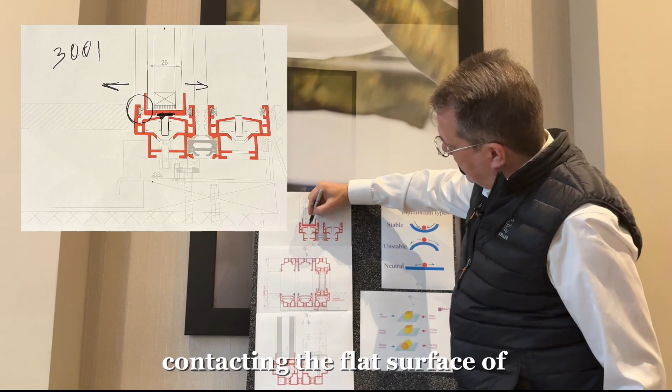So earlier Vitrocsa systems had a bearing wheel surface which was flat, contacting the flat surface of a special plate underneath the glass panel. And that actually is neutral equilibrium, because this glass panel during sliding can deviate to either left or right, creating friction.

So we have different kinds of friction as well. One of them is sliding friction, and one of them is rolling friction. This is what is applicable here. So the sliding friction is the friction between the brushes and the wall of the extrusion and the glass panel, so in this area. And the rolling friction, of course, is the friction between that plate and the bearing wheel.

What happened there? Initially, Vitrocsa used brass plates underneath the glass panel, and unfortunately, brass is kind of a soft material, and that friction is substantial. And also because of neutral equilibrium, the friction is not even, and because the panel can deviate from the straight direction, the friction on either outside or inside surface can be different, and it may result in the panel getting stuck and difficulties sliding this glass panel.

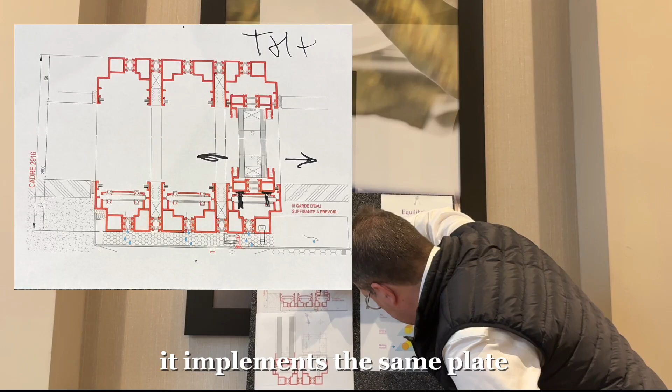The first system, which was Vitrocsa 3001, had limitations as for dimensions and the total weight of the panel. So in later years, they developed a new system, which they call TH Plus, with 2 rows of bearing wheels, and basically the same system. I don't think you can see it, but it implements the same plate, which is perpendicular to the bearing wheel. And again, this is a classic example of neutral equilibrium.

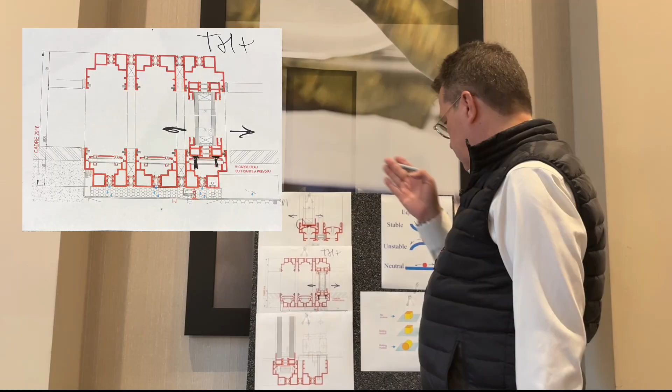So basically nothing has changed except for the second row of bearing wheels. And again, it can deviate from the straight direction to the left, to the right, and it creates twice more friction, both rolling friction and sliding friction. So then the inventor of the system, Monsieur Eric Jaurès, who unfortunately died 3 years ago, came up with the idea of a different placement of bearing wheels, and he called it 4x4.

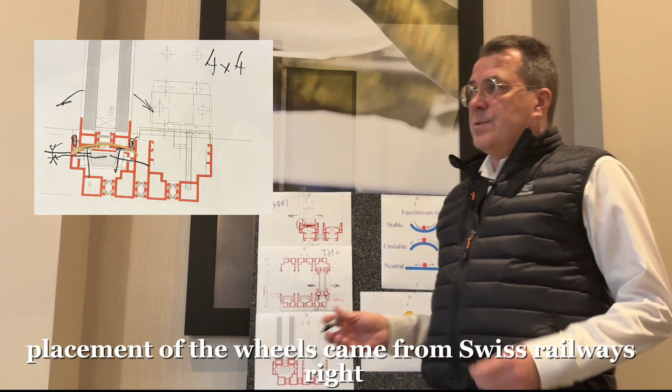And actually, the idea of this placement of the wheels came from Swiss railways, right? We know the carriages of the railways, and every carriage has individually suspended wheels, and well, his idea was like, okay, if I do that, we can probably eliminate this issue.

However, the wheels in that 4x4 were inclined for like 15 degrees probably, and in the wrong direction. So this is the plate, this is the bearing wheel, same thing, plate and the bearing wheel, and that situation actually represents unstable equilibrium. And just to demonstrate the similarity, I'll draw that imaginary line here.

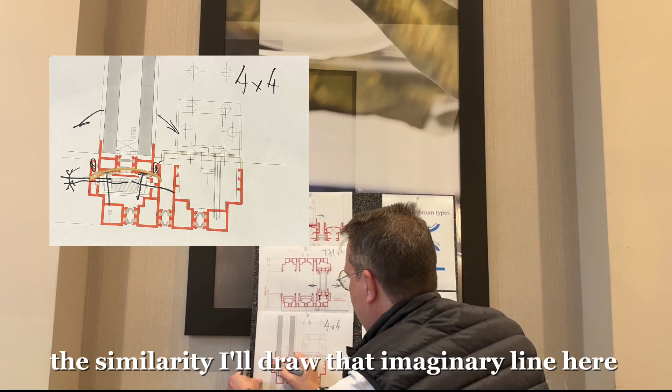So unfortunately, this idea didn't work, and the glass panel, again, can go either to the left or to the right, creating unequal friction on the side, and causing the panel to get stuck. We made with Vitrocsa back then a unique sliding window of 8 panels. Each panel was 3 by 6 meters or 10 by 20 feet.

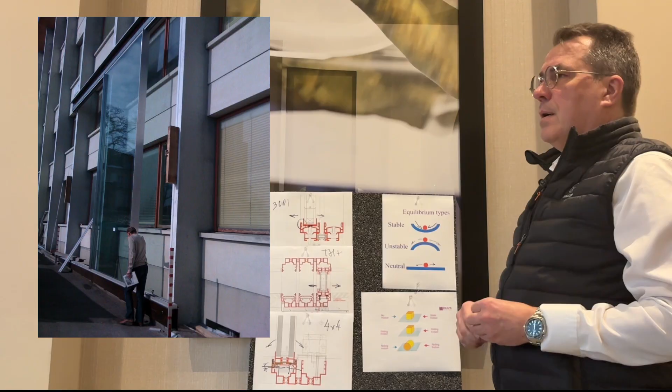And with the extensive weight of the panel, about 2,500 pounds or about 1,200 kilos, that amount of friction became essential. And well, they had to develop a special system to center the glass panel, which was a disaster.

Anyhow, now let's switch. Let me change the drawings, and I will switch to another system which we represent right now, and this is Keller minimal windows. I'll tell you the difference in a second. So we moved from Vitrocsa to another system, which is Keller minimal windows. Keller minimal windows actually was developed back in 2007, based on the experience with Vitrocsa systems, of course.

Keller initially manufactured skylights, winter gardens, and conventional windows and doors. And Keller was using Vitrocsa sliding doors in their glass houses product. And then they had another idea and developed their own product on totally different basic physical principles. And now we go back to equilibrium types.

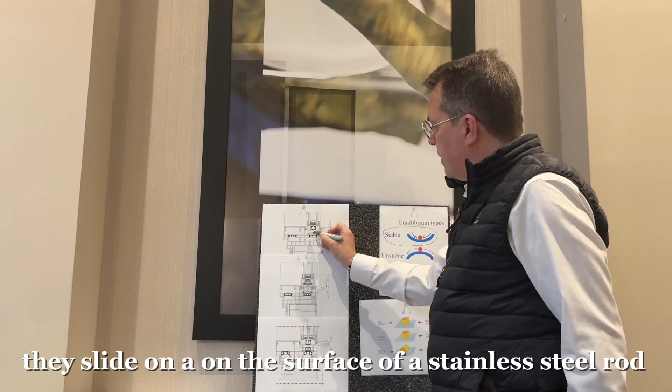So in Keller minimal windows, we're dealing with stable equilibrium because they reversed the positioning of the bearing wheels, and their bearing wheels are actually carved, and they slide on the surface of a stainless steel rod in the base of the extrusion.

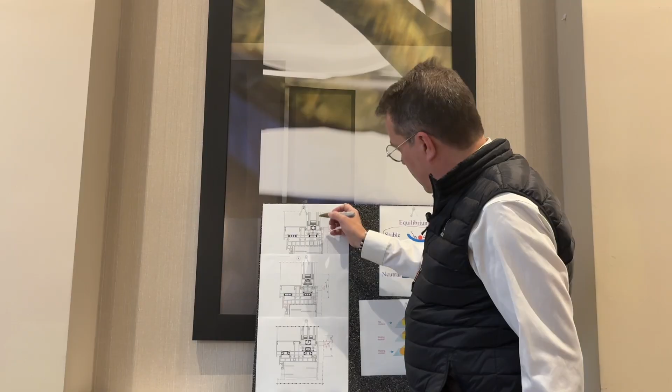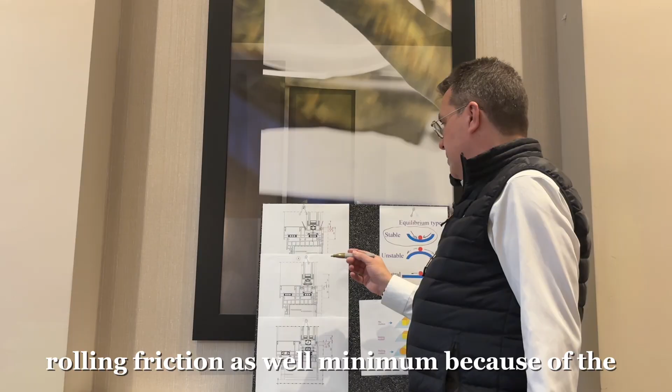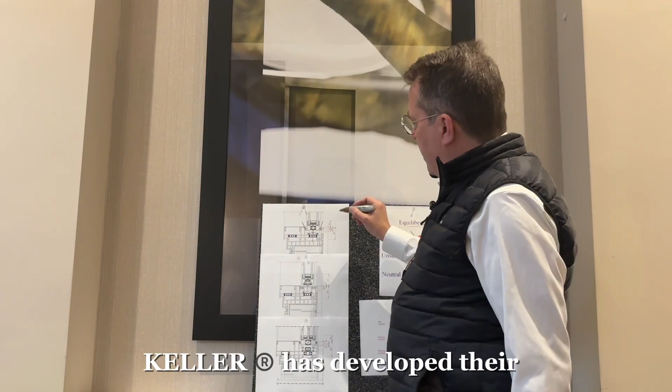So therefore, at every moment, the sliding panel is self-centered and it doesn't go anywhere because of the stable equilibrium, and the friction is equal on both sides and minimal, and rolling friction as well is minimal because of the square footage of the surface in contact, which is minuscule. Keller has developed their minimal window system.

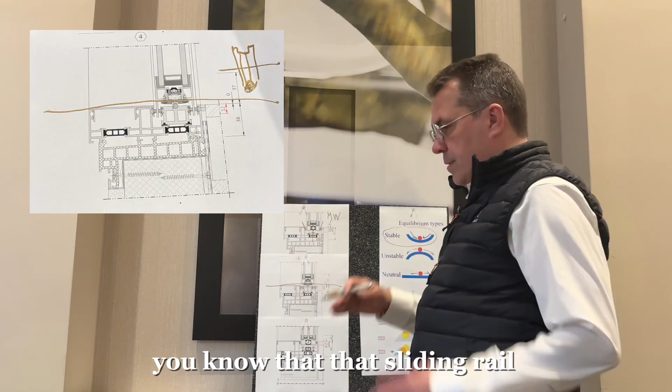Then the next iteration was minimal windows freeway, where there is no step here, and it brings the surface outside and inside, and that sliding rail, to the same level to comply with, let's say, ADA requirements and not to create a tripping hazard.

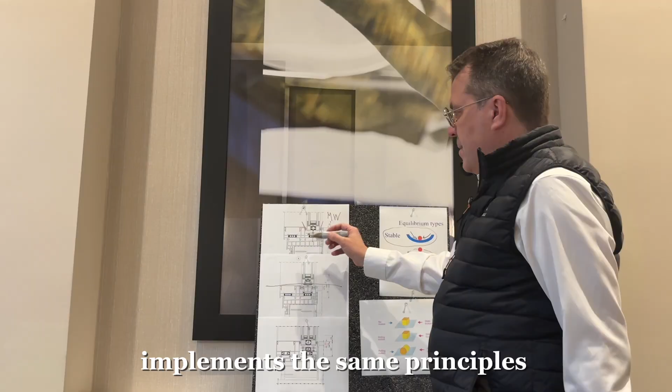It implements the same principles, one stainless steel rod and a bearing wheel which has a carved and curved shape. So because of this shape, it sits directly on the stainless steel rod, and again, doesn't go anywhere. So stable equilibrium with minimum of either sliding or rolling friction.

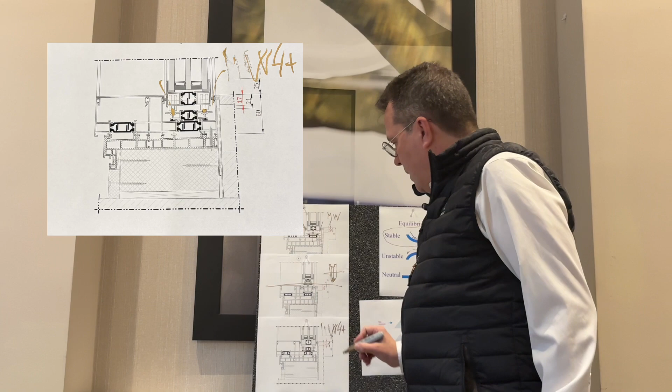And finally, Keller has introduced later on their minimal windows 4 Plus system on the same principles. The only difference is just a pair of bearing wheels and a pair of sliding rails. Same exact carved bearing wheels and stable equilibrium, equal friction, and minimum rolling friction. This is basically it. That's why I like Keller minimal windows better.

And another aspect is a very smooth, silent sliding sensation. In the first place, with the Vitrocsa system, these wheels are located in the base, and there's a distance between them depending on the weight of the panel. And every time that plate comes in contact with the bearing wheel, you hear that clicking sound.

And depending on the speed you're sliding the panel with, the sound could be click, click, click, click. Not every client likes it, while in Keller, it's actually silent. It is actually like Swiss railroads. No clicking sound, stable equilibrium, minimal friction. That's why I like minimal windows better.